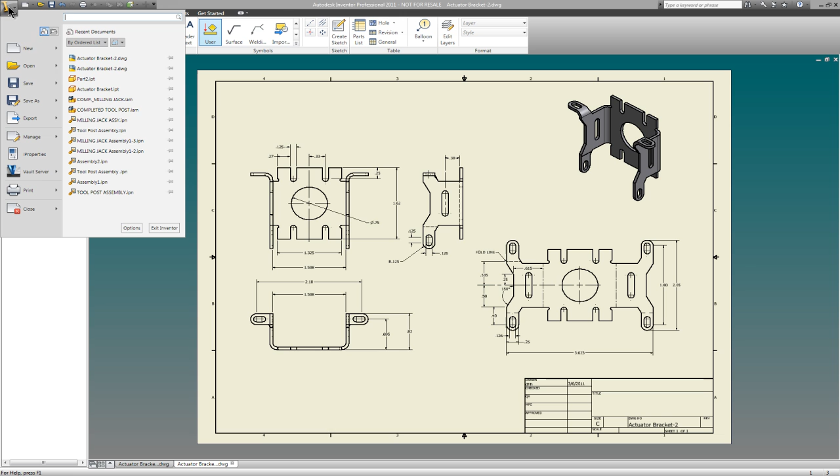So the first thing I'm going to do is I'm going to go in here and go New, English, Sheet Metal, OK. And as we always do, the first thing we're going to do is we're going to go over to the Sheet Metal tab, and we're going to go into Sheet Metal Defaults. Now, I'll let you know right now, one of the things you can do is once you set up a Sheet Metal default, like for 16 gauge, you can save that as a default template, and I'll show you that in another video. But you can set up a default template for 16 gauge.

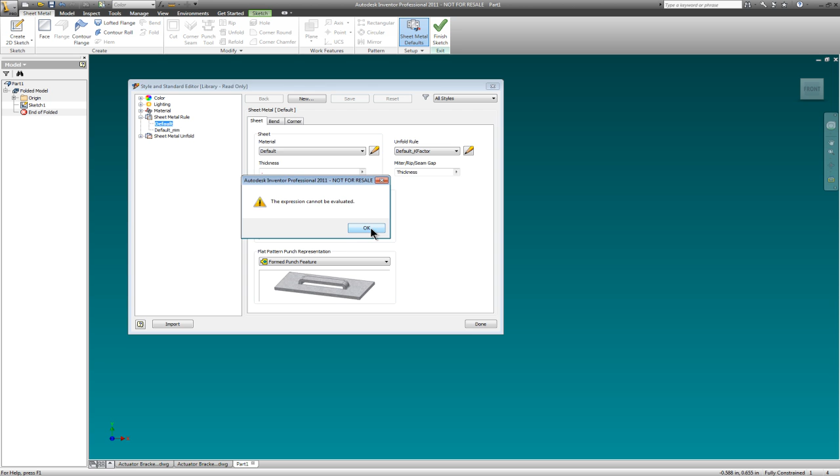So the first thing we want to do is go to the Sheet Metal Rule tab, and we want to change our thickness to point. Oh, we don't want to change our thickness. Excuse me. We want to go to New, and we want to go to 16 gauge. Mild steel. Probably should put gauge in there. Okay. Oh. And then see, I didn't want to do that, but there's my 16 gauge right there.

Double click on it. Now I'm going to go in and change my defaults to it. That's going to be 0.0625, and I'm going to go into my bend right now. I'm going to pick round, and I'm going to change my bend radius to 1 point. Oops, in fact, remember, we don't want to do that. We want to leave it thickness, and we want to add an asterisk and 1.5. There we go. Then we'll go back to our sheet metal, and we can go in here to our defaults if we want to, and we can go down and pick mild steel or steel mild. And so there we go.

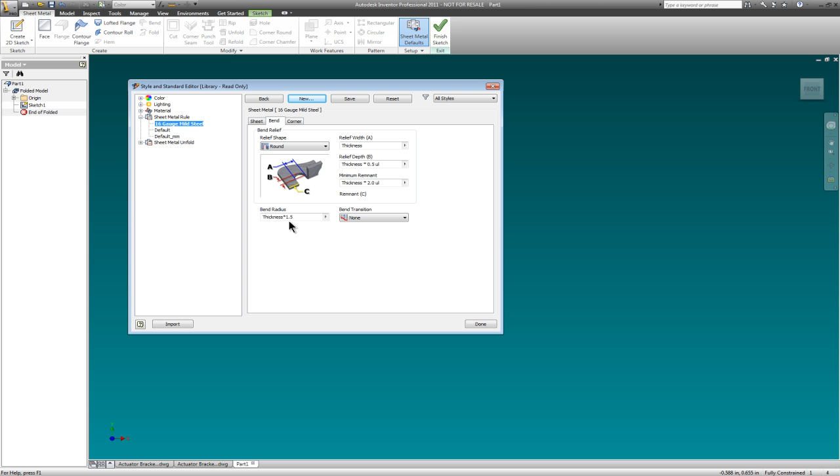So the way this should be, we should have created a new piece, and we named it 16 gauge mild steel. We went in and changed the material to mild steel or steel mild. We changed the thickness to 0.0625. We went into bend. We changed it to the round. We have a choice up here, and we chose the round. And then we went to the bend radius. We left the thickness with an asterisk and 1.5. Back into our sheet metal.

Now we're going to go to our K factor, and we're going to go edit, and it's going to ask us if we want to save what we've done so far, and we'll go yes. Now, first thing we do, new, and we're going to do V bend 16 gauge mild STL. We go OK, and then we're going to double click on it, make sure that it's highlighted. And then we're going to do our changes here. You could leave it at 0.44. My call out on my book is saying 0.41, so I'm going to use 0.41. And then I'm going to go done. And do I want to save these edits? And I go yes. Okay, we are all set.

We're looking at our sheet metal rule at 16 gauge mild steel. I want to unclick this little box here that says use thickness from rule. I want to use my 0.0625 as the thickness of my material. I have my material style as mild steel, and I have my V bend as 16 gauge mild steel, and we have set that up, and I'm going to go apply. And then we close this out. So we are ready to go.

And then I'm going to go right up here to my sketch tab and click on that, and we are then right in our sketch tab, so we can go ahead and start. I've been really trying to come up with some ways to make this a little easier to do. So I think we'll try this. I'm going to go to a rectangle. I am going to start right here on this center point, because it's really important that we stay on the center of all our planes, and it'll come and save us a little bit later. So what I'm going to do here is I need to turn my light on so I can read.

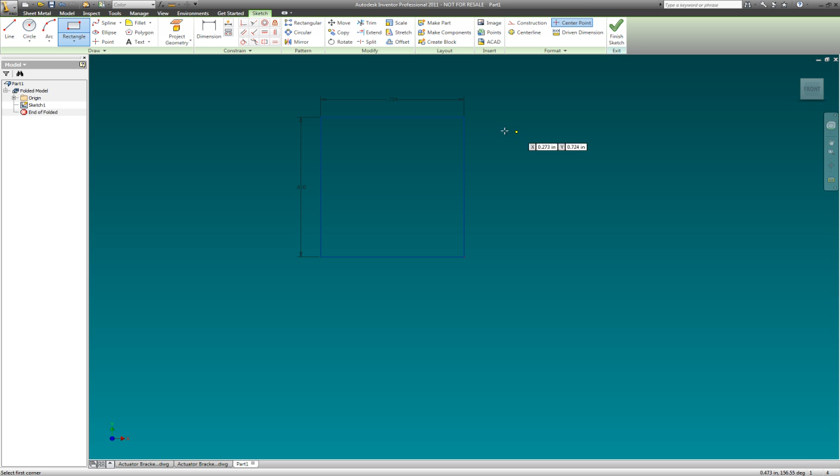build. And I want to show you, as we go into our ISO view here, and we go to our origins and drop that down, escape here, I want you to see that we are right on the center of that plane. Okay, and if you look at our axis center, it's right down there at the corner. And this is going to be important later on, because when we go to do some bends, we need to do it with a plane. You have to use a plane, center plane, and if you haven't centered this, you're going to have to go back and fix that.

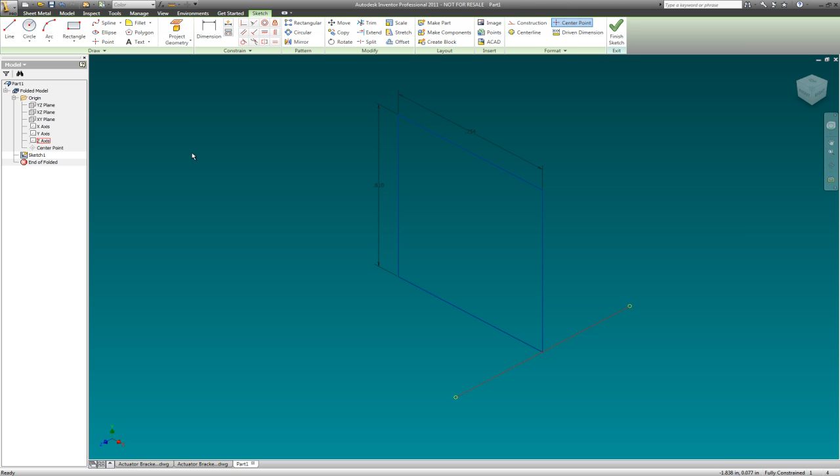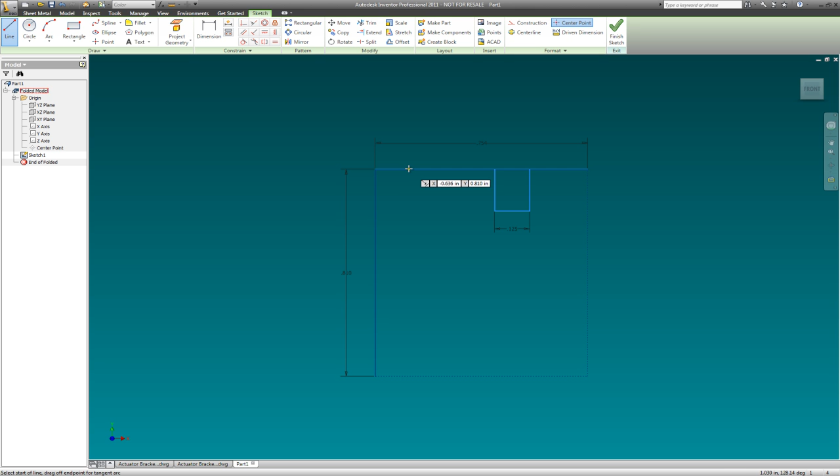Come around here. First thing I'm going to do is grab those 2 lines and make those construction lines. Then I'm going to get out of my construction lines, so I'm back into regular lines, and I'm going to go to line, and it looks like I got a point somewhere right around here, come down, and 0.125, and come on up. I don't really care about the height at this point in time, I just want it to be perpendicular. Okay. And then I got a corner of this getting cut off also. So I'm going to come over here to the corner, come down here, and come over here.

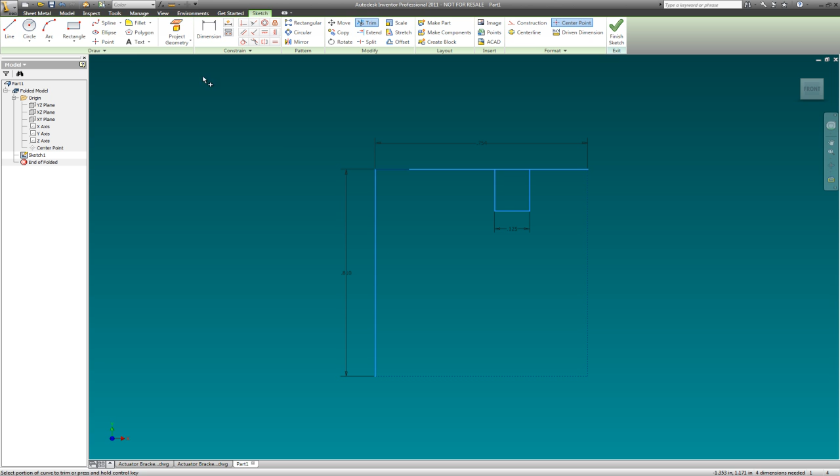Now, the first thing that we have to do is throw our dimensions away, because if I go to trim this, I can't trim. If I go to trim, you'll see that I cannot trim this because, oh, why, you made a liar out of me. Oh, look at you. But it didn't trim what I wanted. So let's try and trim this, and I wonder if I can trim that. Nope, I can't. So that's why you have to get rid of the dimensions. And we're going to just delete those for right now so we can trim this out. Okay, great. And while I'm in the trim command, I'll trim that out also. And then I'm going to give this some dimensions.

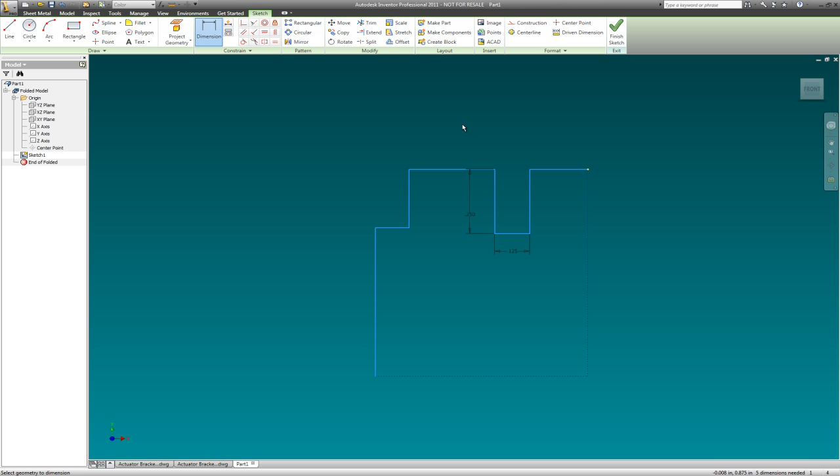And we have a dimension here from here to here of 0.25, and you notice this changed on me, so what I'm going to do here is see if this parallel constraint will work with this. Nope. And so what do I want to do? So what I'm going to do is hit the equal constraint and go from this side to this side. There we go. Some other dimensions that I have going on here. From the center to this point here wants to be 1.325 divided by 2. There we go.

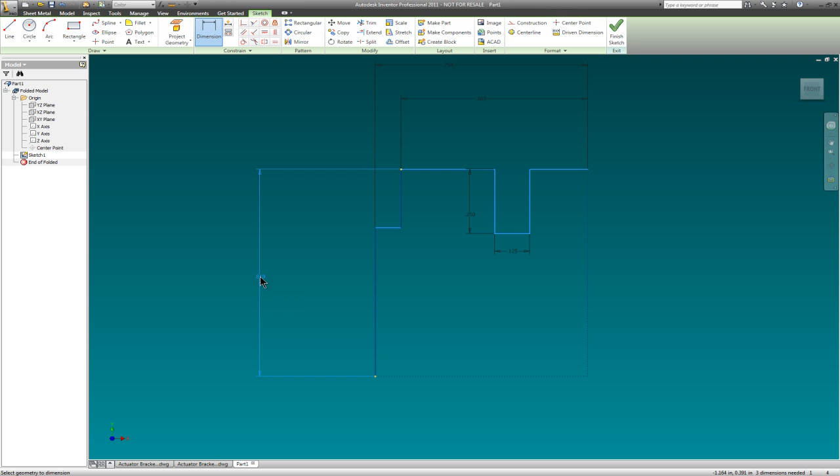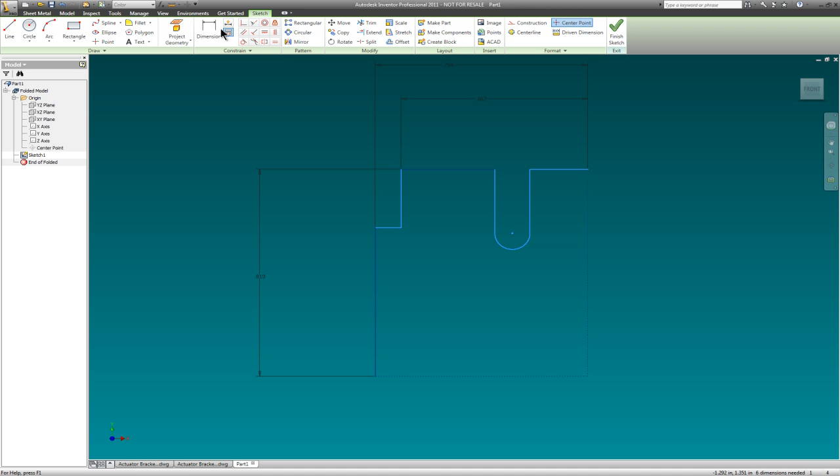And while I'm here, I'm going to re-dimension my object here and just pop that on there like that. And I'm going to pick that point and go down to this point here and just accept those because I haven't really moved them. I'm going to drop this dimension here, throw that away. Oops, excuse me. Grab it and throw it away. I'm going to put a circle down here on the center of that and go to the quadrant. I'm going to throw that away, and then I'm going to trim this. And that is my dimension that I need. And again, you need to see me putting dimensions in because I may want to change things later. So that's the only thing that I'm doing right now. And I'm going to give this a dimension here from there to there. Okay? So I believe that is all the dimensions that I need to create what I want to do.

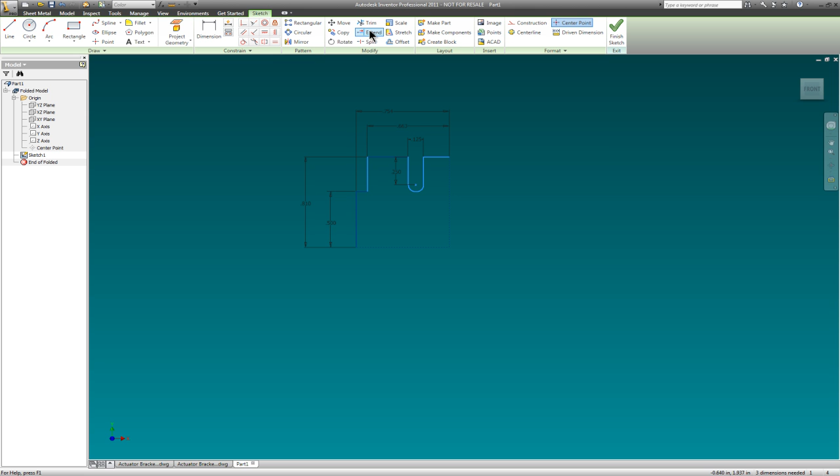So what we're going to do here, so I have my construction lines. And oh, I don't have a depth here. So let's dimension that, and that dimension wants to be, oh, and that's coming from the center. So I'm going to delete that, and that is coming from this center point here to here, and that should be 0.5. There we go. And I believe that is all of the pieces that I need to do. And I'm good. So I'm going to go up here to my mirror. I'm going to grab my geometry. I'm going to pick my mirror line, and I'm going to put that right over there. And having mirrored that, go done. And mirror again.

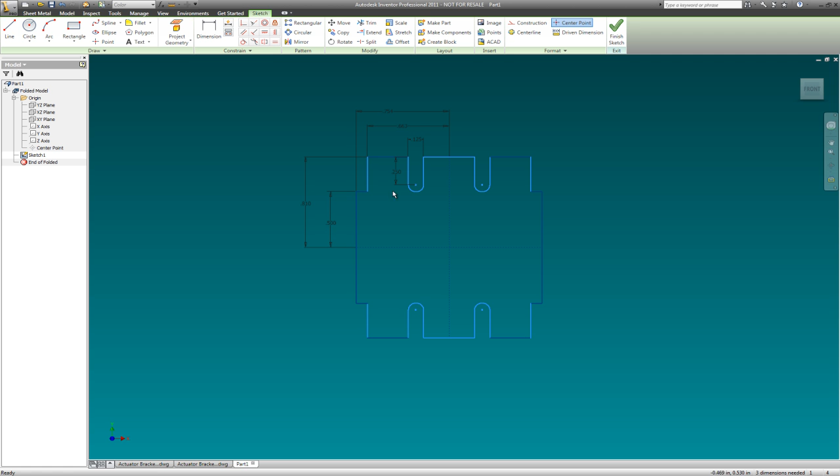And pick my mirror line, and use that line there, and apply, and done. And so I created all 4 pieces of the single piece just by creating a rectangle. I'm going to go finish sketch. And now we're going to go for the first time to our face up here, which is going to give us our sheet metal. There it is.

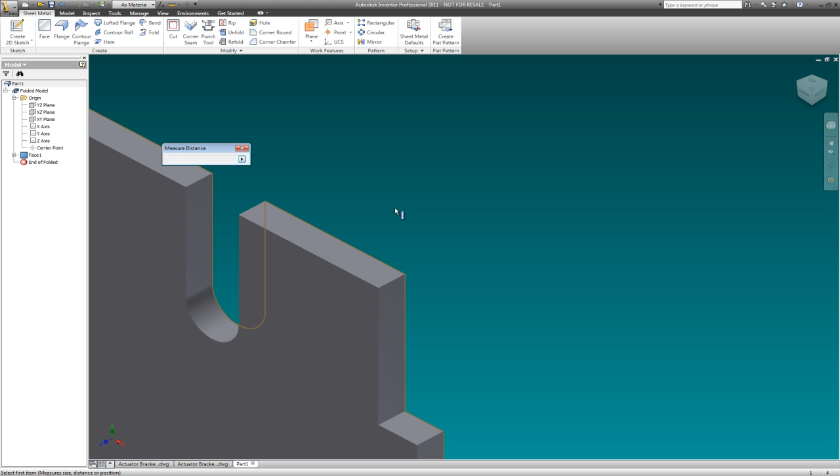And I'm going to go apply. I'm going to come up here, not double click. I'm going to go up here to just above view and go to our measured distance. And I'm going to pick and measure that edge and confirm that that's 0.063, which is the round off of 0.0625. I'm good.

Now what I want to do is I want to go up here to our friend flange. And see the little line here selected? You just highlight that, and then you can come and select any edge you want. So I'm going to pick this edge right here. And I want to show you some of the things you can do. First of all, you can make it go either way, so coming towards us or going away from us. Okay. I'm going to have it come towards us.

And then if you see here, we have an inside base face extents. I believe that's what it is now. I'm going to go bend from the adjacent face. So I moved it right out to the very face of it. I came in right to the edge. And this one moves it in even farther. Okay. So right now I just want to use this outside of the base face extents.

And we have a bend radius that we're using up here. Okay. And we have 90 degrees. And the only thing we want to change here is we want to change this to 0.5. And we're going to go apply. And I want you to see what happened here. It cut a little notch out. And that's this little notch that we defined earlier. We went to the round notch.

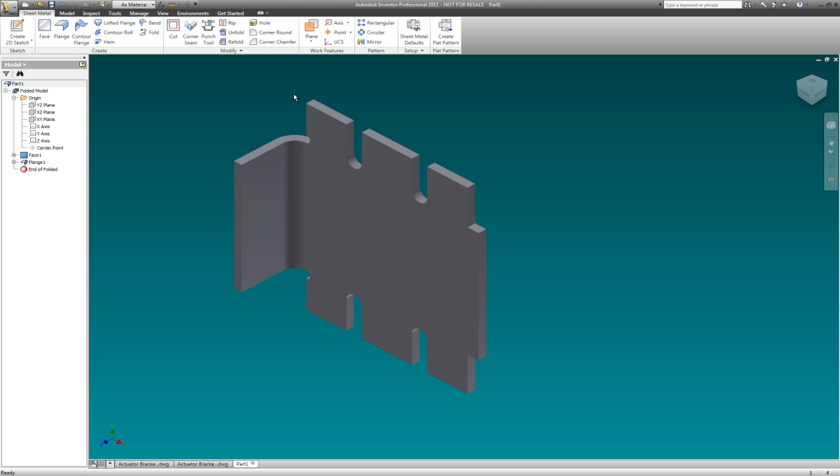If we go in here and go to straight, I don't know if it'll change it. It won't change it as right now, but let's do the other one and see what happens. So let's go to our flange. I've changed that to straight, and let's see what happens when we do this one. And again, we're going to pick this here, and I'm going to go apply. And no, it's still the round bend radius because that's what I had defaulted originally. But if I had changed that, it would make a square notch in there.

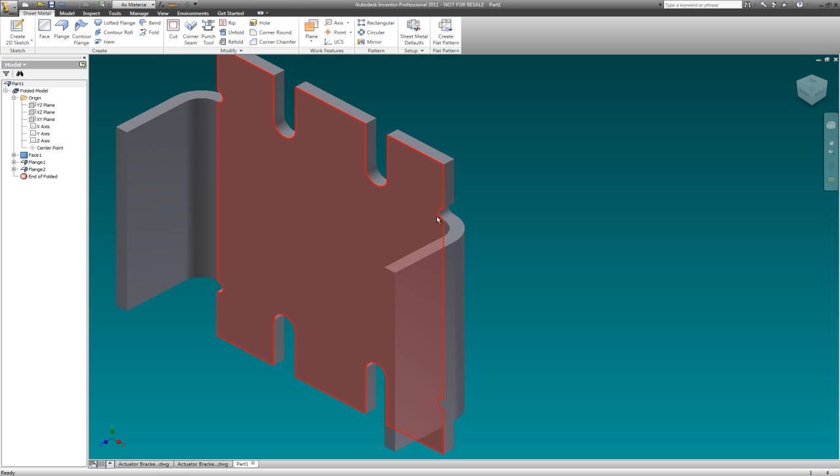Okay, we're doing great. So we did our flange bend, and everything's looking really good. One of the things we can do right now is confirm that the distance is correct across the 2 of these. So I'm going to go up here to my distance measure tool, and go from the inside corner to the inside corner, and it should be 1.508, and it is 1.508. So I just confirmed that I have it in the right place. You can tell from the other choices the flange could have been farther out or farther in, but we wanted this 1.508.

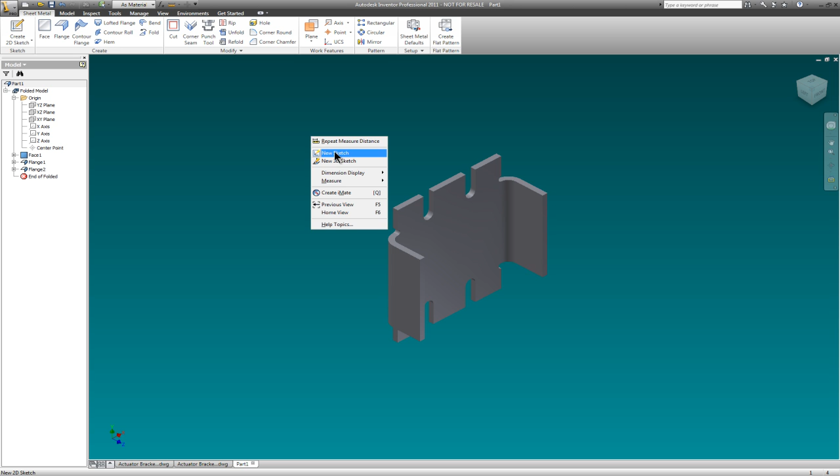Now we're going to do something that we've done many times. We're going to sketch, and I'm going to go new sketch, and I'm going to pick this face right here. Come around here, and I'm going to rotate it so it's easy to look at. And I want to go ahead and sketch out a little pair of hangers on the corner here. So I'm going to start out, I think, with a circle this time.

And the diameter of that circle is... What is the diameter of my circle? 0.063. Oh, that's the radius. So 0.063 times 2. There we go. And that's the inside hole. And then we have an outer size hole, and the distance on that is 0.25 across. So that would be 0.25. There we go.

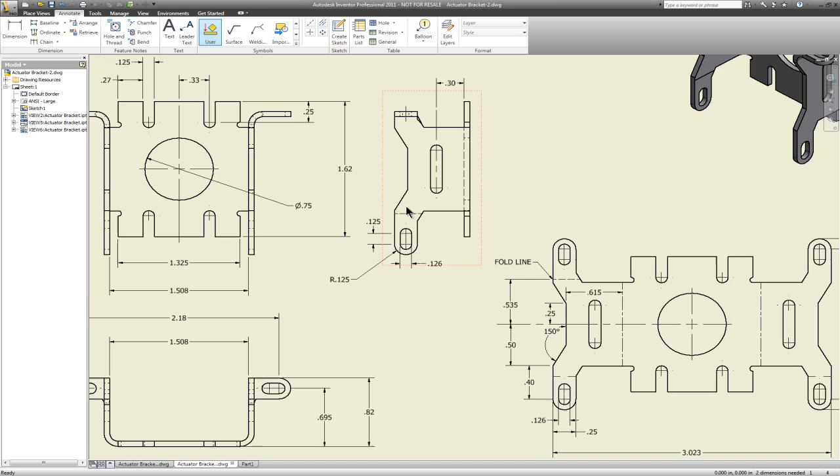And here's what I'm going to do. I got some dimensions that come up and give me centers here. And I'm going to go into my actuator drawing bracket and look at those and see if they will help me define this. Distance looks from here of 0.40. Let's confirm that. See, it's really nice having this other drawing up. I can cheat a little bit here and confirm some distances. And this is how I would probably do this so that somebody else would have an easier point of doing this.

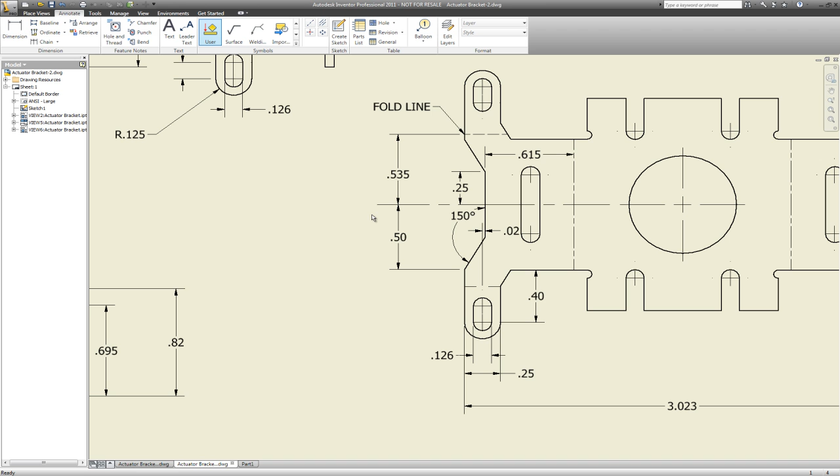Now, one of the things we don't have is this distance up here, and that's a problem. I got a distance of 0.615 to there, and then if I went from there to there and pulled that out, it's 0.02 is the height difference there. Let's see here if I can park that right about there. Great, okay. So 0.02 and 0.615. And I'm going to do some more checking here. Here's where we want our distance because we've already folded this. So we already have this fold. Let's go take a look at this.

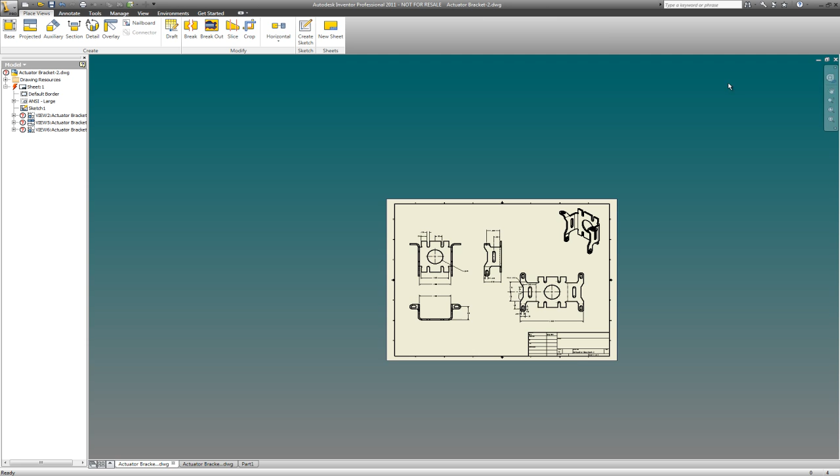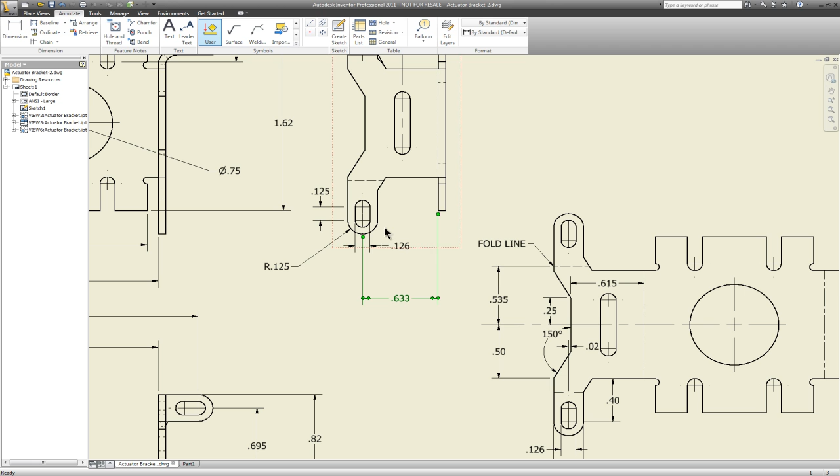My part, so I'm going to close this out. There's my part, and what I'm reading here is that I have a distance we can figure out. So I'm going to go here to here, and it's 0.63 to the center. I'm going to take that out and make sure it's not a little bit more. I'm going to go out to precision 3, and it's 0.633. Let's go see if we can make that in our part.

Let's rotate our part up here to make it look the same. And according to this, from here to here is 0.633. Great. And the distance from here to this edge is 0.4.

Let's go back to our bracket and double check that there. That's what it's looking like for me, 0.633. And again, we'll put this dimension here from here to here, and that is 0.4.

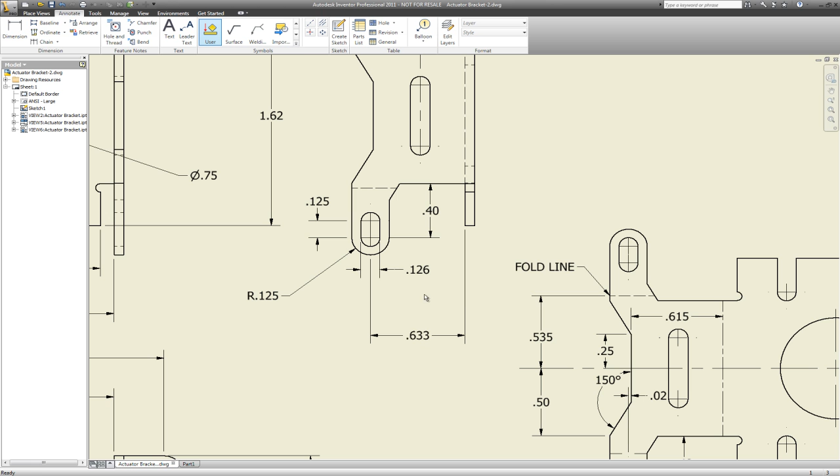So that would be a great way to be able to, as you set up your drawings for someone to go back and forth between these two. Okay, I think I'm happy with that.

And then I have an ear that comes off of here and comes out here somewhere and goes over to there. And then I've got another line that comes off of here and goes over here and comes down like this. And I know it goes over to the center point. There we go.

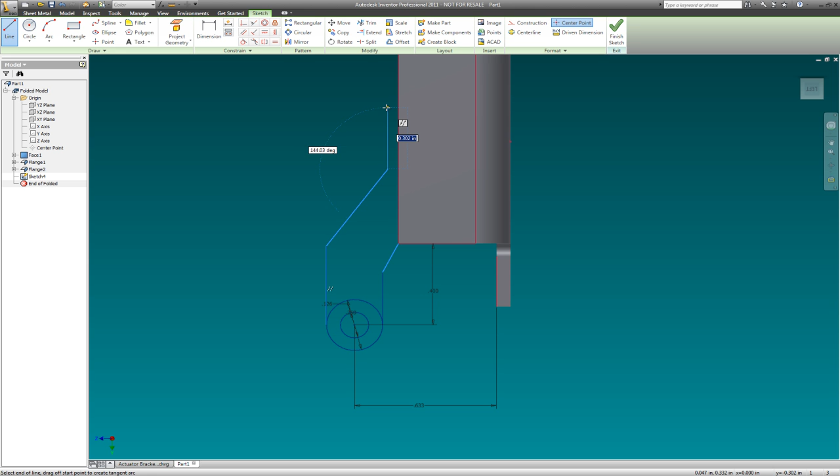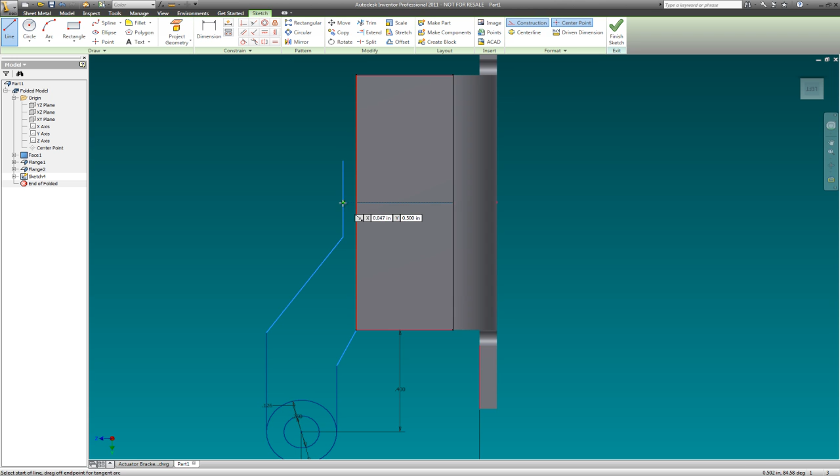What I'm going to have to do here is project some geometry. So I'm going to project this face so I can have the geometry. I'm going to go to my construction line and pick a line and hopefully find my center. And there it is. I can just draw that right up to there, and I should be able to trim that now.

And we know that our distance is there, and we need a distance of 0.02 here. 0.02. There we go.

Oh, and that's taller than that. Excuse me. It's from this point here, and that distance is from here to here. 0.615. There we go, that is what it is.

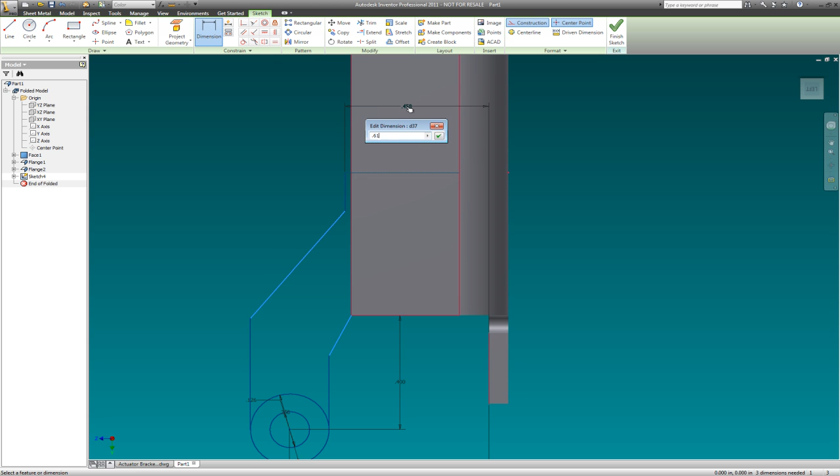And this is a distance of 150, an angle of 150. And I believe I'm getting closer here. This is looking more like what it should be.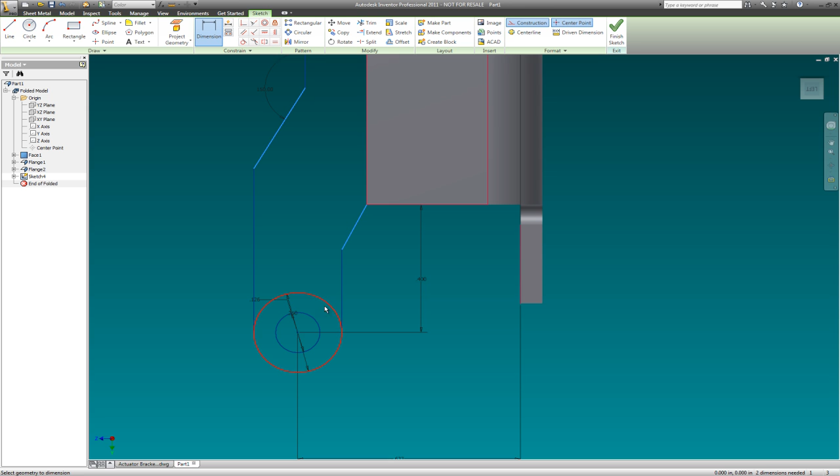That distance to center is there. Okay, we can trim this out, and then we need to copy this circle here. I'm going to grab my base point, which is this point right here, and just bring it up like that, and done.

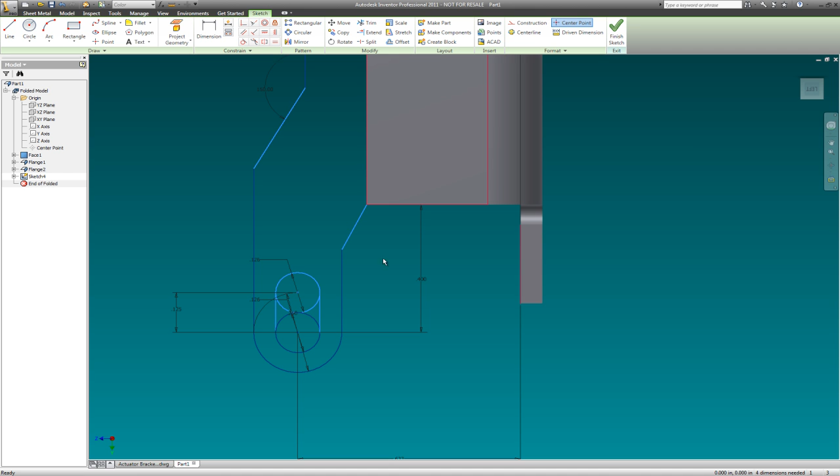And then I'm going to draw a line from the quadrants here to the quadrants or tangents. I'm in construction, so I want to get out of construction. I'm going to pick that and just pick my construction line, then make sure I turn off construction. I really wish they'd give you two lines. I hate the fact that I have to go back and forth between those all the time. You know, they could afford to give me one more icon up there. They really, really could.

Trim. I'm going to trim this, trim this, trim this, trim this, and I'm going to go in here and just go grab that and delete that. And what I can tell you is I happen to know that this diameter here is...

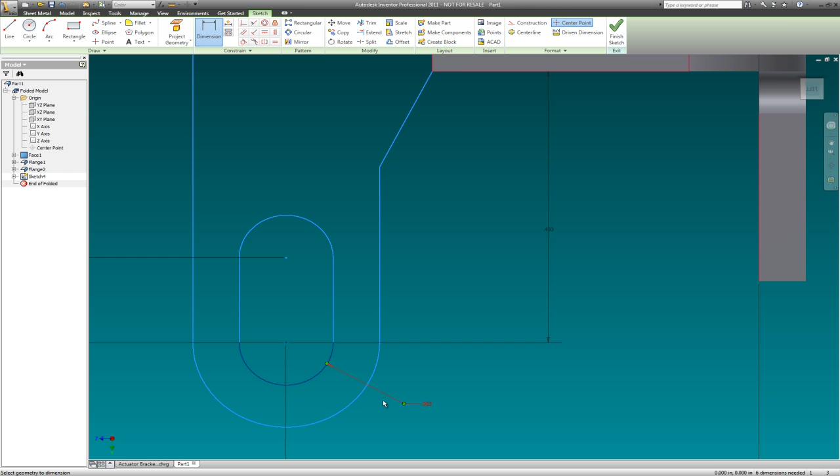0.13, so let's make sure that is correct. 0.63, great, okay. And this diameter, I'm not even going to give this a diameter, I'm just going to give it a thickness here of 0.25.

And I believe if I rotate this, am I going to be happy with this? That looks really good, that's the best I've done this. I think that's the simplest, 0.25 tall.

The 633, which I'm reading, is it 633 or 613? Excuse me while I check my dimension. And that is actually 615. So I'm going to go in here.

And it's just that the print is so darn small for me. Okay, there we go, it didn't really change much at all. And I think I'm looking really good.

So now I'm going to go to mirror, pick my geometry, pick my mirror line, and mirror it over. Oops, let's try this again. Mirror, pick all my geometry, go to my mirror line, and apply. There it goes. Done, and come around here.

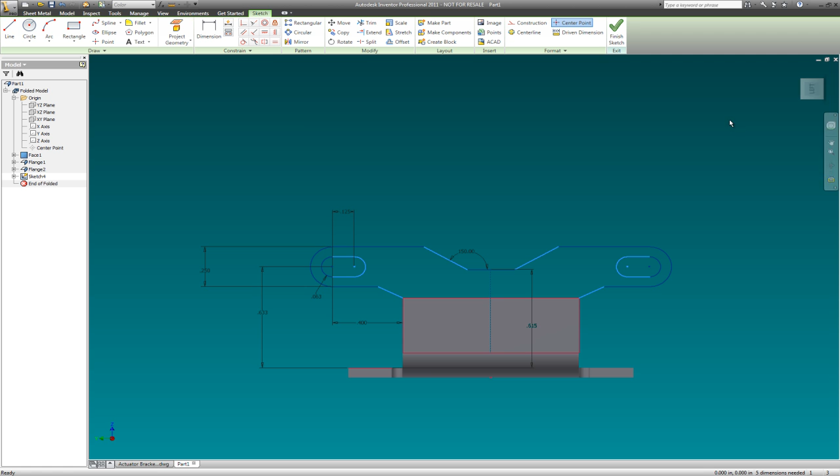That's looking good. Finish sketch. And you know, you can actually use face on this, I believe. Pick profile, can I? Nope, notice I have a red cross here, which means our sketch doctor is in need of use.

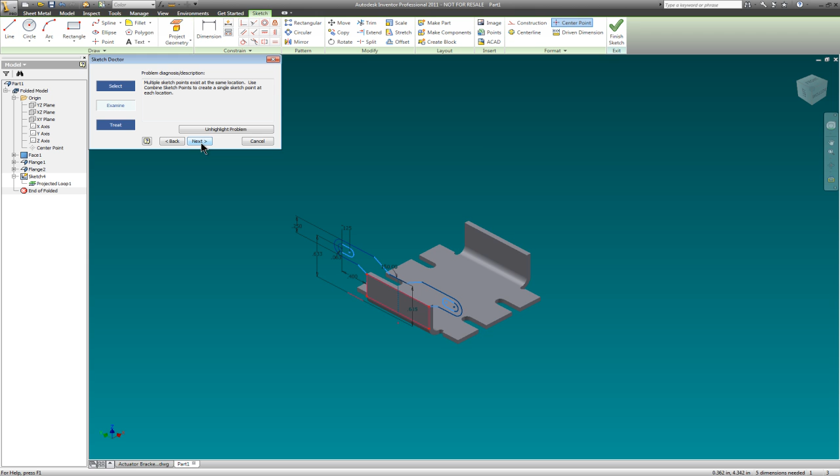Okay, so I'm going to go back into my sketch here. I'm going to go edit sketch, and in my sketch I'm going to go to the sketch doctor, and diagnose the sketch and go okay. Oop, I got some points here. Diagnose sketch, okay, and open loop, and next. I'm going to unhighlight and highlight the point.

So I need to zoom in here and click, click, click. Boy, I'm not seeing it, it's not jumping out at me. Finish. Yeah, let's try that.

And it's not going to let me do it. I'm going to go no. Come on, okay, so let's go to Sketch Doctor again and diagnose the sketch.

Still have an open loop somewhere. Ah, right there, you can see it. I'm not attached to that corner, so I'm going to go cancel.

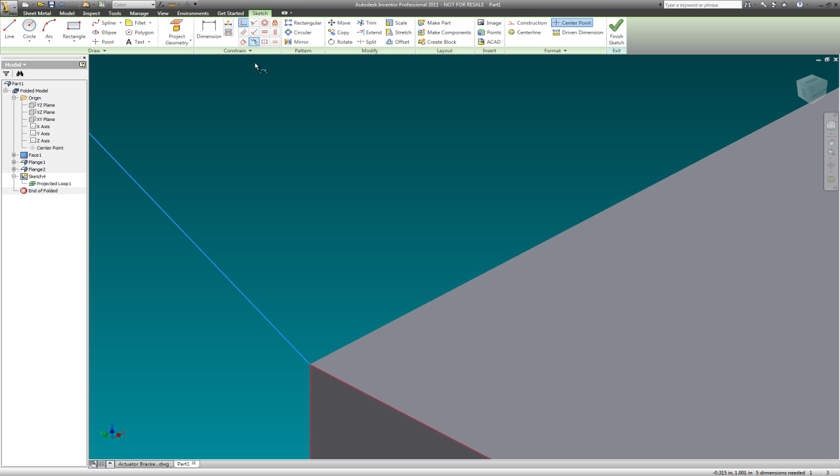And let's zoom in here, and let's go to coincident. Okay, it tells me it's already constrained, and we have a line there and a line.

Okay, I'm going to hopefully be able to do this. Let's go up here and go to face. Nope, it's only picking those. It's not picking it. Okay, so we're going to cheat.

We're going to go to model and we're going to go extrude. And again, I do not have what I need, so I need to really go into my sketch doctor here and find out what's wrong. And next, and finish, and OK, and diagnose sketch.

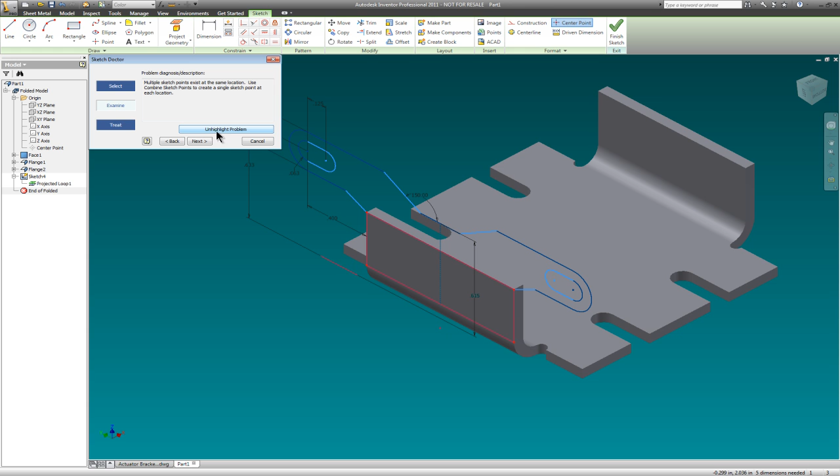Highlight and unhighlight. I'm seeing the red dots right here and here. I'm thinking I need to add a line, so we're going to do that.

So I'm still in my sketch mode. I'm going to just go in here and add a line from here to there. And escape, and go finish sketch.

And we're going to go to sheet metal and we're going to try and do face this time. And it's still not letting me do it, still not letting me extrude. I'm going to find out what's going on and I'll get back.

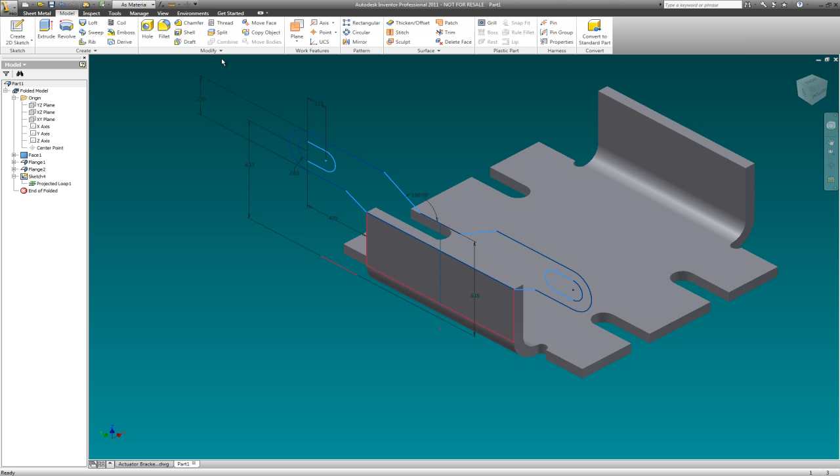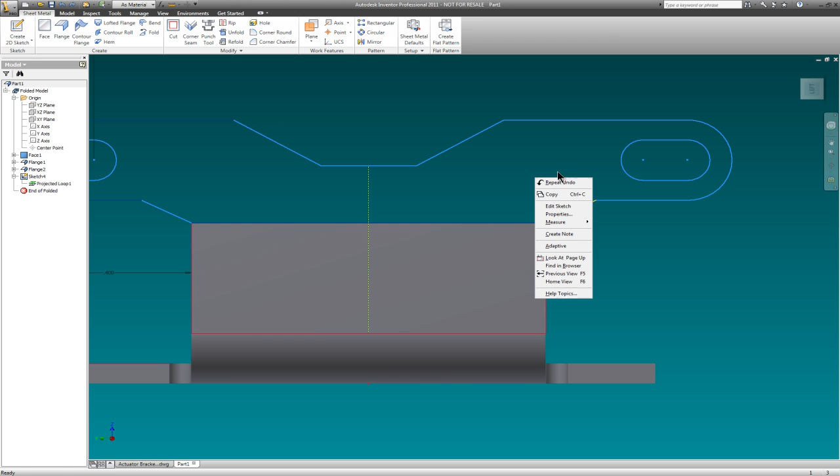Okay, after lots of research, pretty much I found out what the heck was going on down here. And it's these two right here where they connect right here and right here. So to solve it, I'm going to go in and edit the sketch, and I'm going to throw this away, and throw this away, and it was right at this point here that it was not connecting.

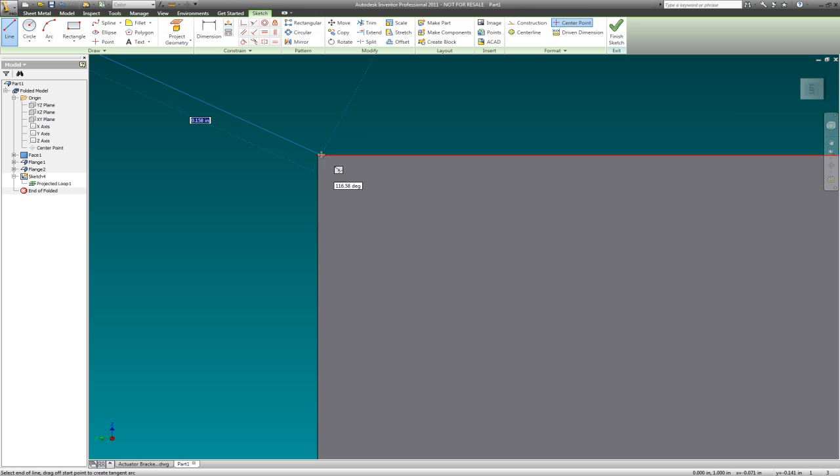So now I'm going to connect a new line from there to there, and you can see there's a little something going on. I want to connect it to that line. There's something really going wrong here.

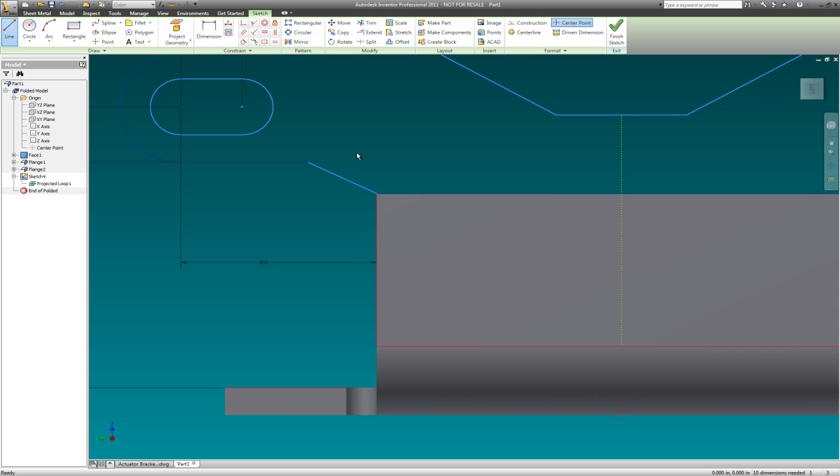And I wonder if this is because of the bend. Okay, got it. And come up here and pick it right there. And enter, and pick it, and come up there.

Finish sketch. Now let's go into my ISO here and let's go to face. And there it is. Okay, worked perfect.

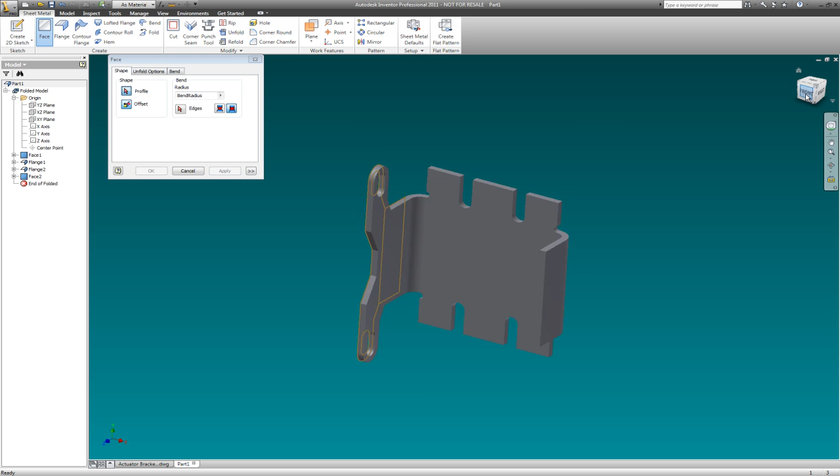Sometimes you really just gotta dig down deep and figure out what the heck is going on. And I'm going to go apply, and there's that new piece right there. I want to go back in here.

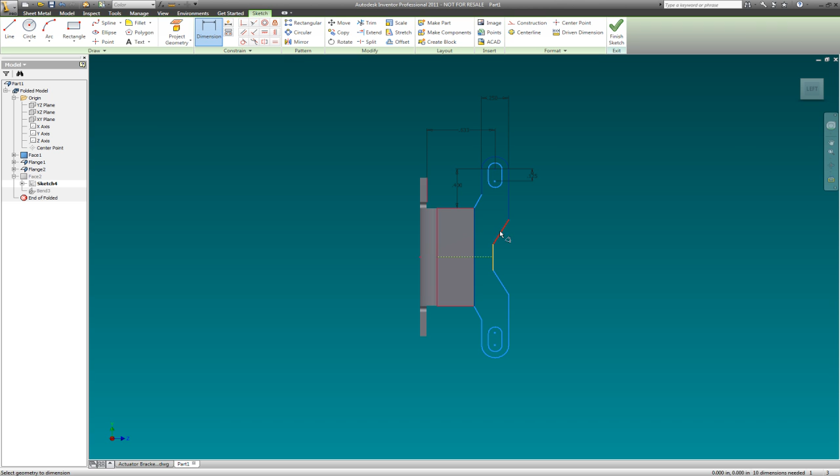I want to go back into my sketch for a second here. And I'm going to go into that sketch face right there, and edit the sketch. I want to add a couple more dimensions just to make sure things are okay. There we go, there's 150. And I think the rest of that is okay.

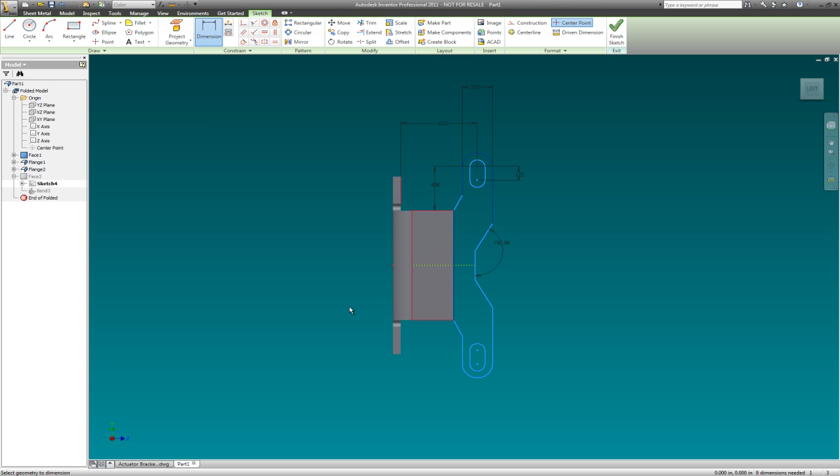And we have our overall height here. We needed the height, I believe it was from this face here to that - oops, excuse me - this face here to that face there, and that was the 615. And done, and finish sketch. And there we are.

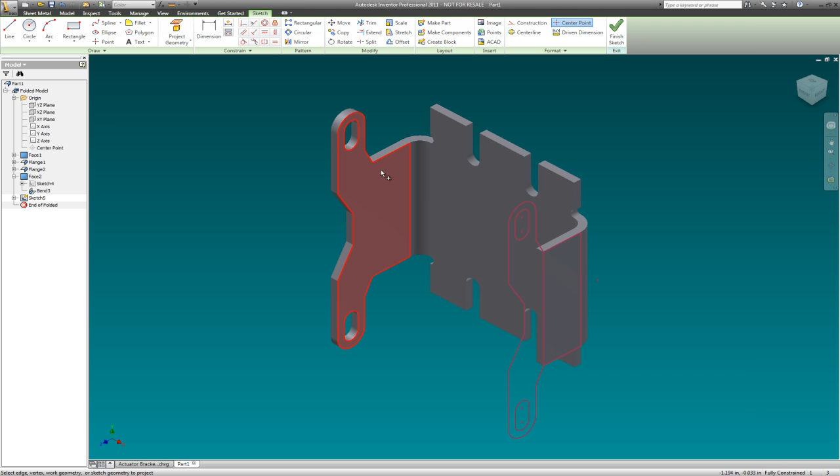Okay, so now that we have this, what I'm going to do here is just project this over here. So I'm going to go to New Sketch, pick this face right over here. I'm going to project this geometry. There it is. And I'm going to go Done.

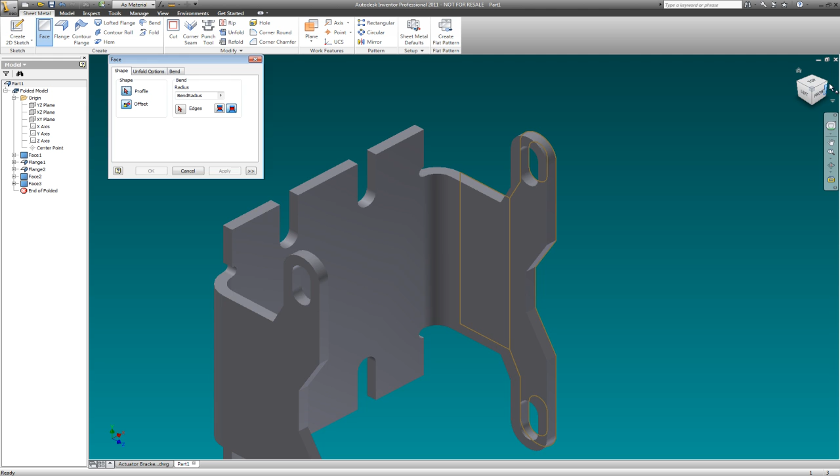And hopefully we can go to Face. And there it is. Make sure it's going the correct way, and it is. Notice it knows which way to go, which I find is really interesting, and apply. And there we go, without having to do anything to it.

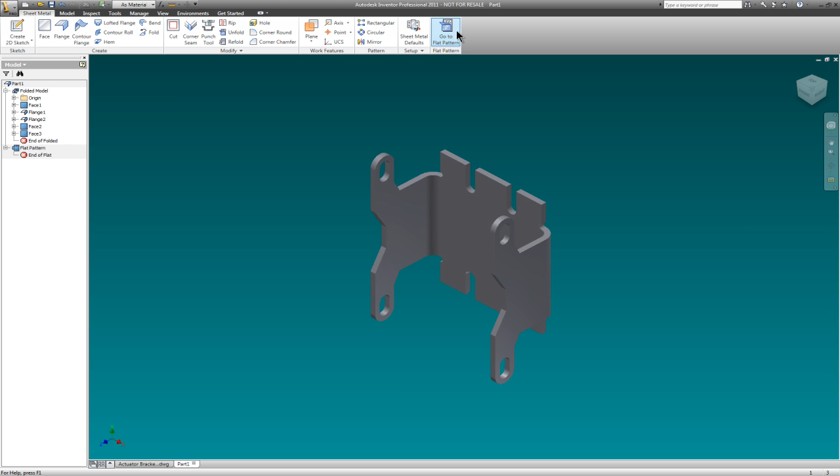One of the things I want to do before I leave, though, first thing I want to do is make sure we got a flat pattern. And we do - it flattens right out exactly the way it should. Folding up, folding out, folding up, folding out. Okay, I'm a happy camper.